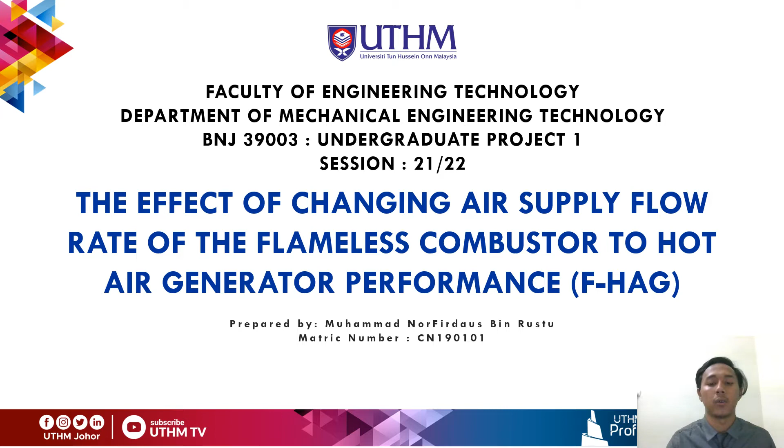Today I will explain about my undergraduate project 1, session 21 and 22. The title is the effect of changing air supply flow rate of the flameless combustor to hot air generator performance (F-HAG). My name is Norfirdaus Rustu. The matric number is CN190101. The supervisor is Dr. Adam bin Kasani.

Firstly is the introduction. The first is research background. Firstly, the hot air generator is used to heat any type of space that requires efficient heating. Besides, in many industries, hot air generator is always used for quenching and drying products to make a final product.

Second, hot air generator operates using conventional combustion. Third, conventional combustion produces high level emissions such as NOx and CO. NOx is nitrogen oxide and CO is carbon monoxide. Fourth, flameless combustion is a method used to reduce NOx and CO emission. And lastly, UTHM aims to promote flameless combustion into hot air generator to a semi-industrial industry.

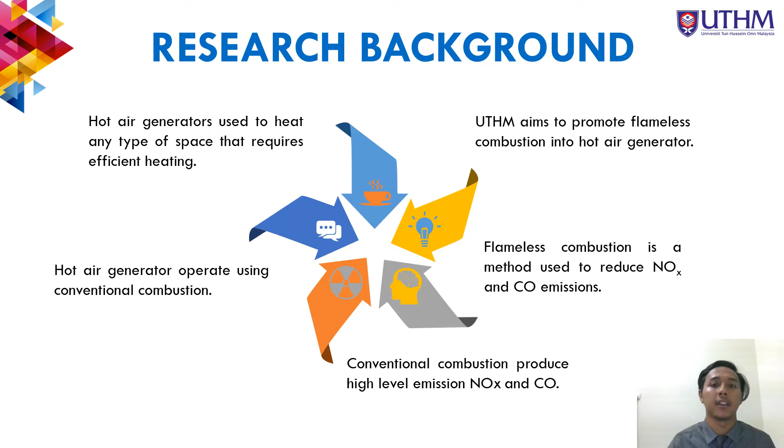Okay, second is the problem statement. Firstly, in most industry, they were using conventional combustion for hot air generator. Second, using conventional combustion has produced a vast amount of pollution. The pollution affects humans by damaging the ecosystem that they rely on in water and on land. Such as in water, people use water for our life, that is bathing and drinking, and on land, we use oxygen in the air to breathe.

Third, conventional combustion generates high emission of pollution, NOx and CO. And lastly, there is no experimental study about the effect of changing air supply flow rate towards the rate of emission produced by flameless mode.

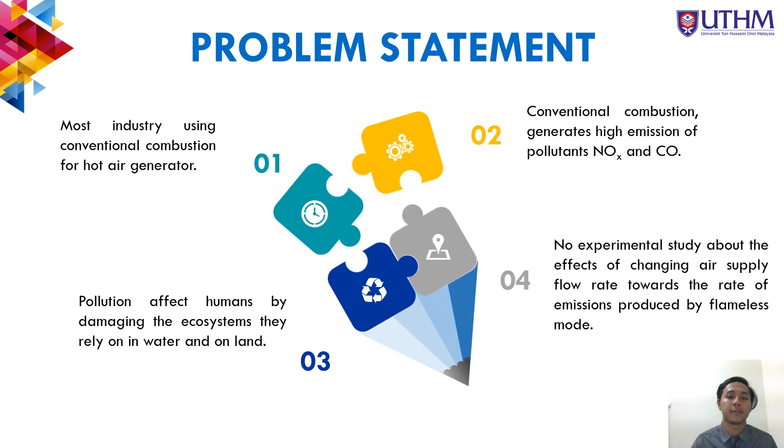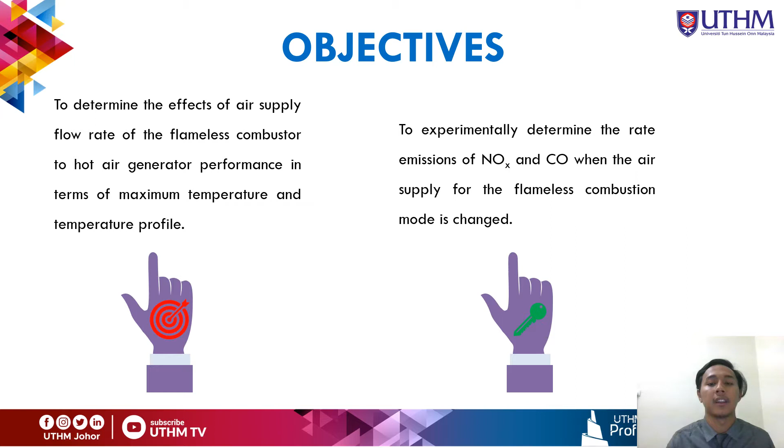This is the objective of the project study. Firstly, to determine the effect of air supply flow rate of the flameless combustor to hot air generator performance in terms of maximum temperature and temperature profiles. Second, to experimentally determine the rate of emission of NOx and CO when the air supply for the flameless combustion mode is changed.

For the scope of study, firstly, the use of liquified petroleum gas, LPG, for the fuel supply. Second, in this project, we use a single fuel inlet installed at the inlet flank of the combustor. Third, 4 air injectors are used to supply the combustion air through the front of the combustor, and the range of air supply towards the combustion is 4.8 until 39 multiplied by 10 to the power of -4 kg per second only.

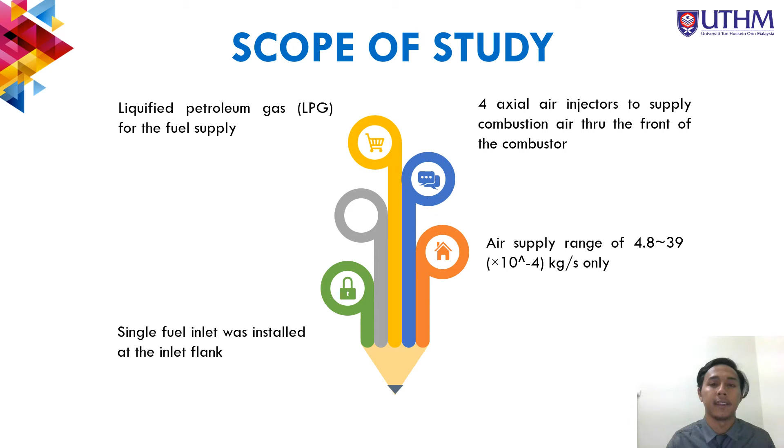Okay, the significance of this project study: firstly, this knowledge can be applied to other difficult-to-burn fuels such as heavy oil and biofuel. Second, this project study can provide a high stagnation temperature with small losses in stagnation pressure and low pollution emission for the hot air generator. Third, flameless combustion releases extremely low levels of NOx and CO, almost zero, to the atmosphere. This makes this project a green technology. And lastly, it increases the equipment lifetime.

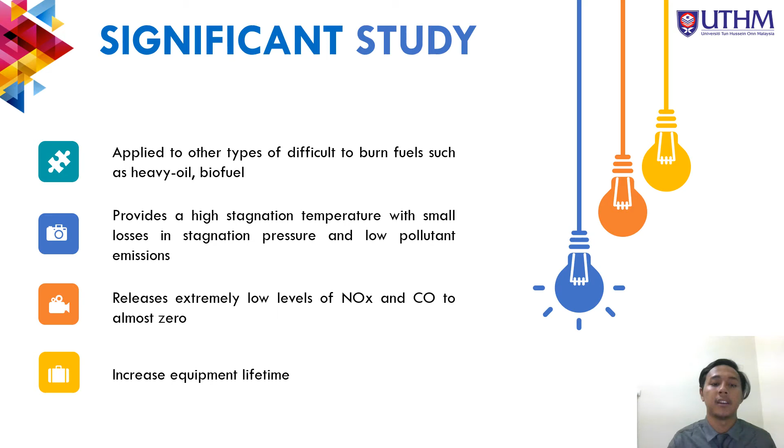Okay, this is the literature review. The first point is the flameless combustor. Firstly, the peak temperature of flameless combustion should be less than 1300 degrees Celsius. 1300 degrees Celsius is the thermal NOx formation temperature. This is because nitrogen oxide forms at temperatures above 1300 degrees Celsius. Second, the temperature inside the combustion chamber should increase over the auto ignition temperature of the fuel.

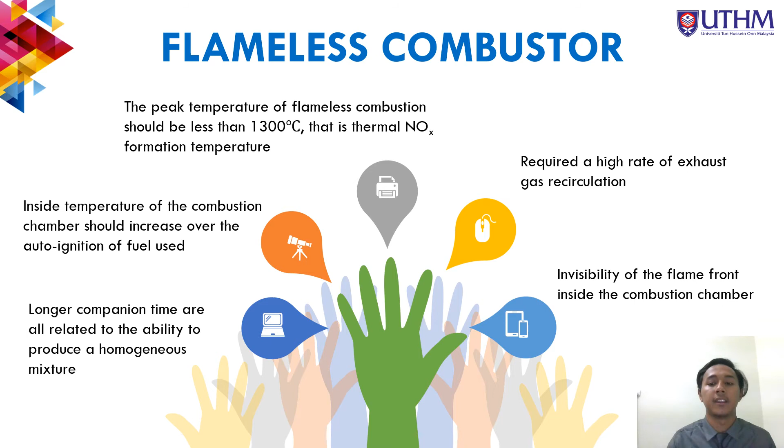Third, the longer companion time is related to the ability to produce a homogeneous mixture. This will help to get the flameless mode in the project. Fourth, a flameless combustor requires a high rate of exhaust gas recirculation. This exhaust gas recirculation will help prevent overheating of the combustor. And lastly, the invisibility of the flame front inside the combustion chamber.

Firstly, in conventional, there is a thin layer of the combustion zone that occurs at the flame, that is a mixture between the air and the fuel. Second, the conventional combustor produces high level emission of CO and NOx. And lastly, it is low in efficiency because we need to readjust the temperature if it rises above what we want.

For the flameless combustion, the combustion zone is throughout the whole combustor. Second, it can reduce emissions of CO and NOx. And lastly, it's very efficient for the hot air generator to produce temperature for the drying.

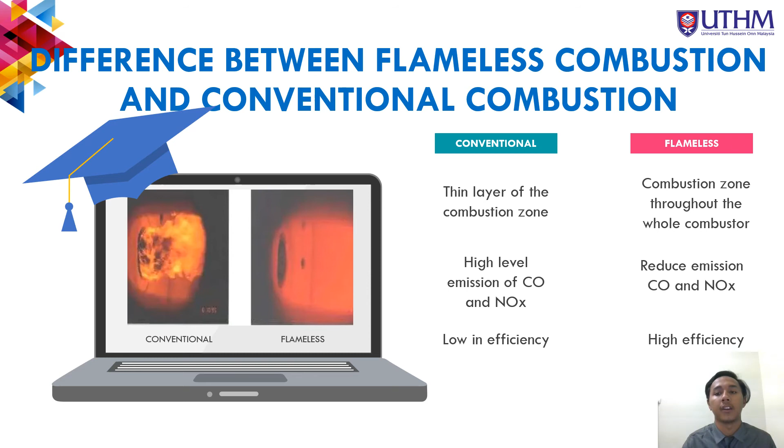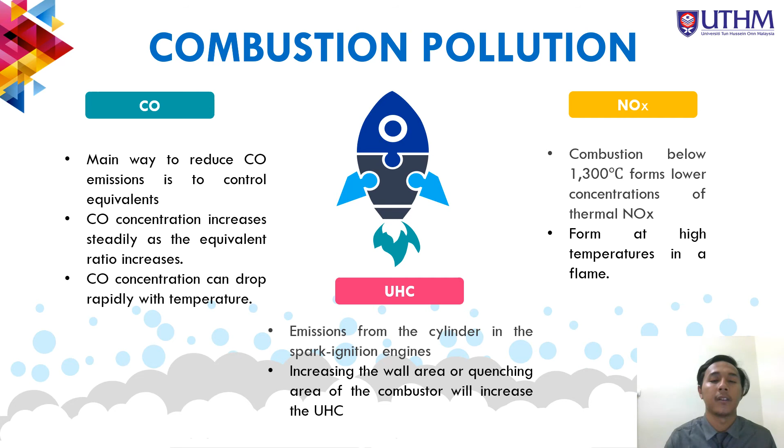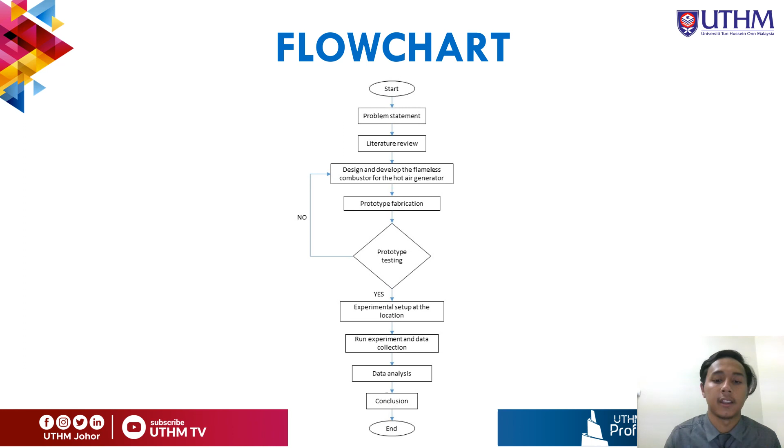Next, we run the experiment and collect the data. After that, we run a data analysis to get the information we want to test in the project, that is the level of NOx and the temperature inside the combustion chamber, and the performance of the hot air generator, and lastly conclusion and the end.

Lastly, there is an expected outcome from this project. Firstly, we hope that the temperature of the hot air generator will be more stable when we use the flameless combustor than the conventional combustor. Second, there is no visible flame in the combustion chamber. This is because flameless mode needs conditions where there is no visible flame like a conventional combustor.

Third, the temperature distribution spreads evenly throughout the combustion chamber. This will help keep the temperature inside the chamber stable and the same at any angle of the combustion chamber. And lastly, NOx and CO emissions are very low for the fuel gas combustion. This can help to reduce pollution emission to the atmosphere for semi-industrial industry.